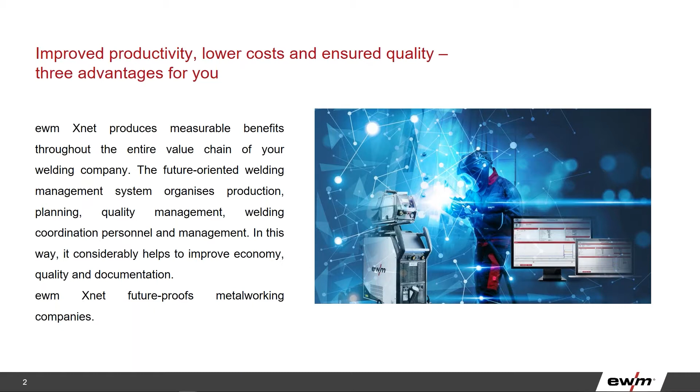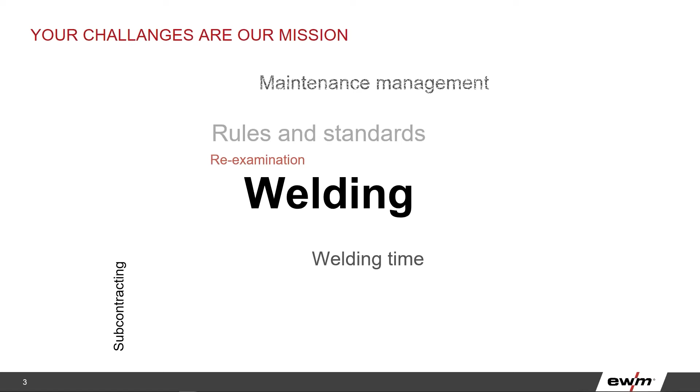This is what describes a system like Xnet. It covers these two aspects, these two points, with a few additional functions, of course. But these are the main two things we care about with a solution like this. And this is what we want to offer for the welding process, because when we're talking about welding, we're not just talking about heat input and welding arc and base materials and filler materials and so on. We're talking about also a lot of other things which will appear now here on the screen.

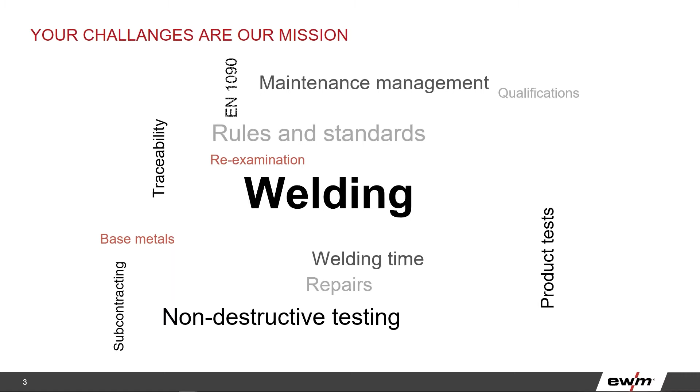We're talking about productivity, we're talking about standards, we're talking about personnel qualification, we're talking about welding documentation, WPSs, WPQRs, a lot of stuff going on in the welding. And to keep track of all of this, be efficient in the work with all these things, and achieving this high level, as I said, of quality assurance is not a very easy task.

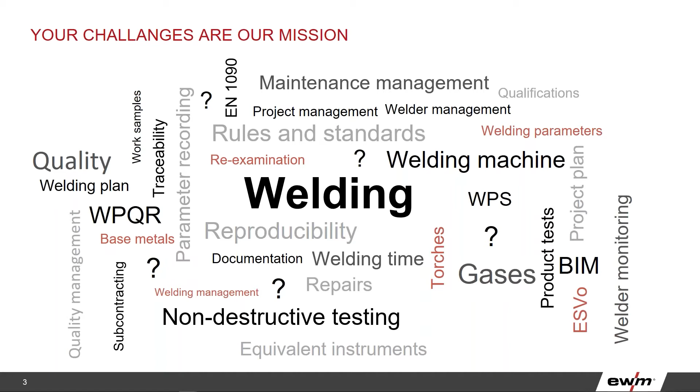And this is something that we took a look at in the beginning, and said, wow, this is a big job, and still we took it. And I'm confident that we are able now with Xnet to offer a very, very good solution to exactly these things. What is actually the biggest obstacle here?

Welding is a very conservative business. Welding machines are normally big, heavy, dirty. The welding process as such also, and therefore a lot of users, a lot of companies are of the opinion, okay, we buy once a welding machine, and even if it's 10 years old and the arc is still burning, it's still a good welding machine. Of course, in the case of functionality in terms of welding, that could be true or is true most of the times, but to use the modern technologies and modern possibilities with old equipment is almost impossible, at least not to 100%.

And this is something to be considered in order to use nowadays potential of systems like this. We have to have also an equivalent equipment on our side, and this is an equipment that could be connected to a network that has the according interfaces to receive information and also to deliver information.

And that was the biggest challenge for us, how to create a solution which is, of course, based on the latest technology that we also develop in the form of welding machines, but also in some parts or in the most parts can be also applied with present equipment in a company.

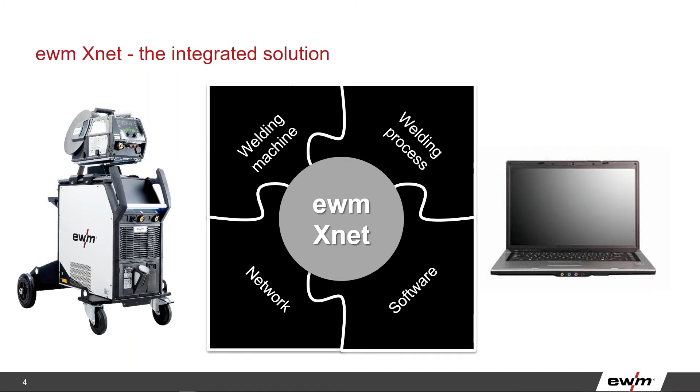And the reason was we were talking to some customers, but not to so many at that point, and we didn't understand completely what is actually the motivation behind wanting to have a solution like this. After that, we started very intensive discussions with different potential customers and also existing customers on the questions: what do you need a thing like this for, and what are you hoping to get out of this? And then these two main topics appeared.

First of all, we needed to gain data in order to calculate, to be able to see where we have potential of improvement, where we can save time, where we can save material, where we can increase efficiency. This was the one aspect, and this is the clear data aspect and evaluation aspect of data.

And the other aspect was, some of our customers wanted to see which part, which component was welded when, how, from whom, and all this relevant information gathered somewhere centrally and available not only now and not only tomorrow, but also in the next 2, 3, 5 years. Because sometimes I still have to show the quality of my work, even with 5 years in between the production and the moment I want to do it.

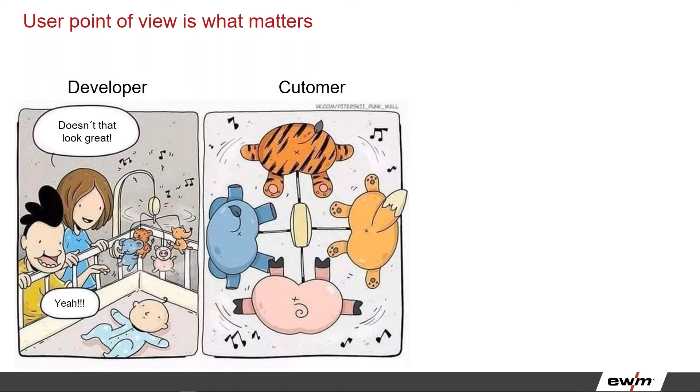And normally everything starts with information about the welded component, bridge or whatsoever. And when you have that information recorded in a digital system, then you can hopefully connect it to the welding equipment that you used for the welding, to the welding process used and recorded, to the employee that was actually involved and performing the welding, to the documentation which was required or used for welding of that part.

And then with the recorded result, you connect it again with the component, so you have everything together, hanging to each other. And if you're looking for 1, 2, or 3 aspects of those things, you have the possibility to sort everything out and see exactly what happened, when it happened, why it happened, hopefully. And based on that information, you can trace back everything you have done on the one side, and on the other side, you can create very exact calculations about your consumption, your time, material costs, and a lot of other things that you can gain from combining the different parameters which you have been recording.

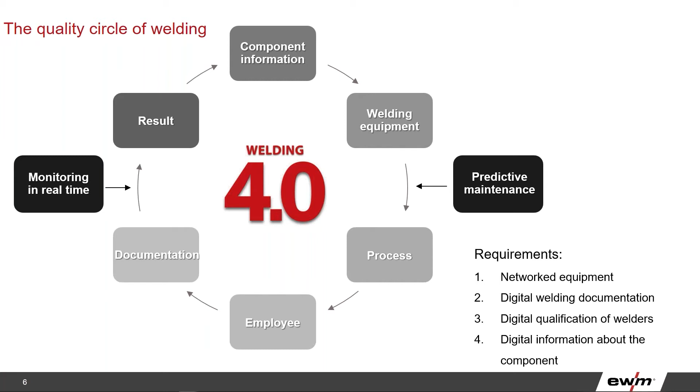Real-time monitoring is so important because it gives us the possibility to really see things in the process which could be relevant for the quality on very short notice. And that is exactly the potential of real-time monitoring for saving costs, because otherwise, if a deviation in the welding parameters is not noticed and leads to a defect in the weld, this defect will probably be seen sometime later in a non-destructive test, and then we have to repair. But the later we discover a defect like this, the more expensive it becomes to correct it or to repair it.

And by monitoring the welding process in real time, we have the chance to react to changes in the welding parameters and then see if there is a need to do something, to correct, to repair, or to say, no, these are just standard deviations in the welding process, they're okay, we can ignore it and continue.

What is the most important thing from my point of view in this possibility is that we now also have the possibility to transport this information directly to the welder. On a display on the welding machine, on an LED bar on the welding machine, or whatsoever, in terms of color or in the form of text, we can communicate this to the welder so he can act right away. This is something that is not possible right now. The welder welds, after that he performs his visual testing, and that's it.

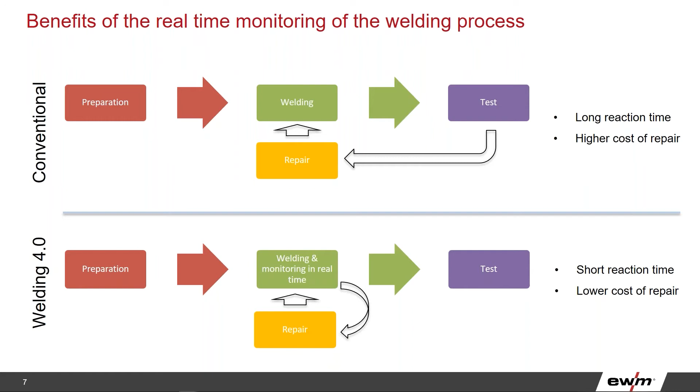But he doesn't see the actual recordings, the actual parameters of his last weld or previous welds. And with a system like this, we can transport this information on a tablet, on an industrial PC, even on a smartphone, directly to the welder, so he can connect to his machine, he can see his last welds, he can see everything was okay, he's inside the tolerances. So the probability that something went wrong is much, much lower. And this helps us again to really meet the requirements that we have set for ourselves or that are set externally by standards or customer requirements.

Predictive maintenance is another topic that brings high potential of cost savings, because when we use a system like this that records our welding parameters, it gives us a chance to establish process secure times - durations in which the welding process runs smoothly and constantly and brings exactly the result and performance that we need. Then we can use this time to activate maintenance timers that inform us this process secure time is over, and we should perform the required maintenance in order to ensure the continuing productivity and security of this process. If we don't do it, the welding process becomes more and more unstable until the big bang comes.

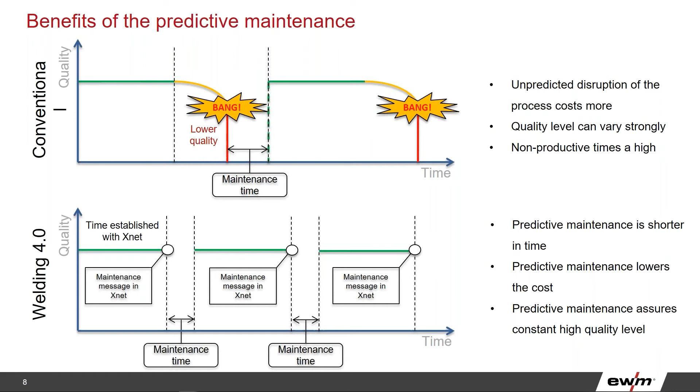Well, after I introduced this overall possibilities with Xnet, let me get a little bit more specific about the product.

We're talking here about a software solution which is server-based. It's installed one time somewhere in a company. The recommendation is to do it on a server PC, because then you've also taken care of backup of the welding data, security and so on. After the software is installed on the server PC, access to the system and the recorded data is just over a web browser on a device inside the same network.

So no additional installations are required, no additional settings are required. Once the software is installed and running, you can access it from every device inside the network, and you only need a web browser for that.

We have a modular structure of the product, which means the user starts with a basic set, which gives them the possibility to connect the welding machines to the network, see them online, record the data, and use maintenance and online monitoring of the welding parameters. That's a very good base to start.

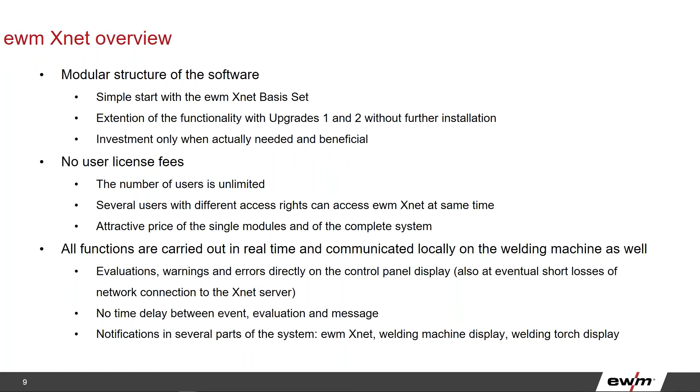So if you have configured the welding machine, even if the network connection is lost, the welding machine still stays capable of acting and communicating to the welder if something doesn't meet the requirements or the required settings.

A very good tool for the welding coordinator, allowing him to create and manage welding documentation, WPSs, WPQRs, even from welded data, which saves a lot of time when you're using already recorded data to import it into a WPS and also to create a WPQR.

That saves a lot of time because you are reusing information already present in the system, and it helps a lot if you're going to get a certification, or if you have to keep your certification according to welding quality management standards like ISO 3834 or EN 1090, because most of the functionality and information in Xnet are actually based on the requirements of those standards.

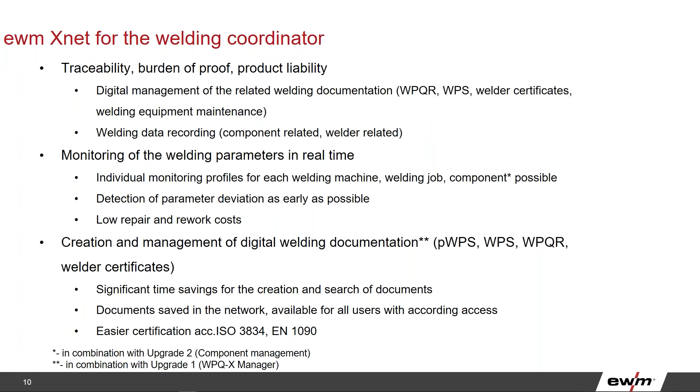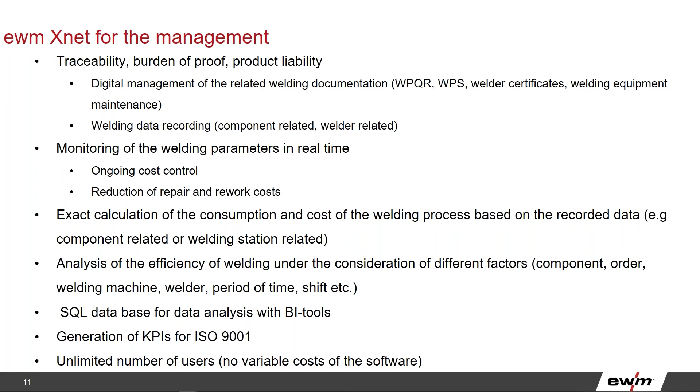For the management, it's very important to keep track of data and numbers, to generate KPIs and to follow up the progress and efficiency of the production. This is something that Xnet delivers straight away.

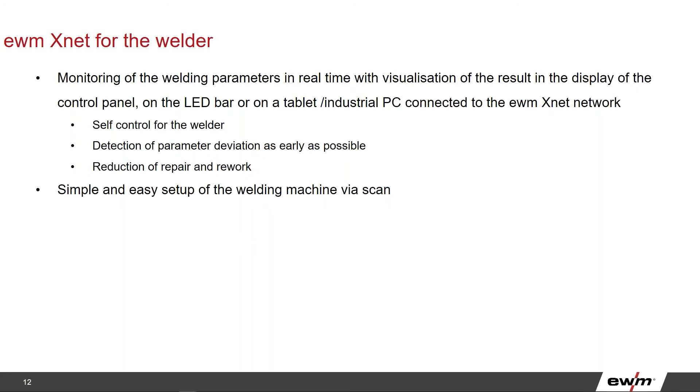And for the welder, very important, he has direct access to his own data, his own welding machine, his own recorded parameters, so he can learn from what he has been doing, or show what he has been doing, and continue working with completely different confidence compared to the current situation, where he only has the possibility to visually see his result, but not to follow up the welding parameters in the last welds.

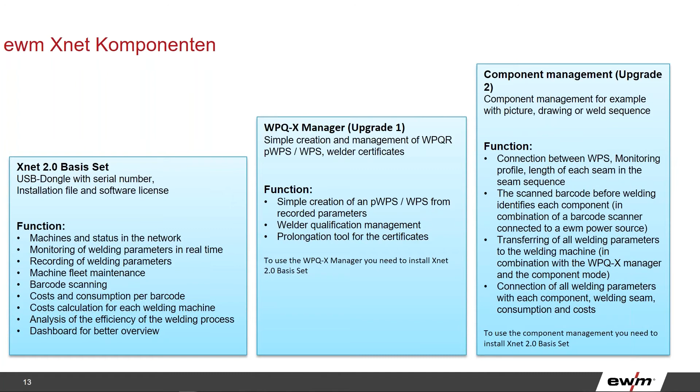I mentioned the 3 different modules, which you can see here on this slide. We start with a basic set with a certain range of functionalities included, and then afterwards you could extend the functionality of the software with a WPQ-X Manager or with component management functions. The way you combine these modules gives different possibilities and functionality ranges. I don't want to get into details here, just remember this slide.

And if you should have any questions, you can contact us, or contact one of our certified sales partners in order to get more detailed information.

Probably the last slide, if I take a look at the time. Yeah, I have 2 minutes left.

And from there, this information is available to anyone who has access to Xnet with username and password, to access that data from any device using just the installed browser of the system.

I mentioned the SQL database, and this is important information because it's actually at the customer's disposal to be used, to be connected also to other tools. So you can merge this data with information from other databases. For that, you need a dedicated BI tool or the according middleware that allows you to merge and distribute data from different databases.

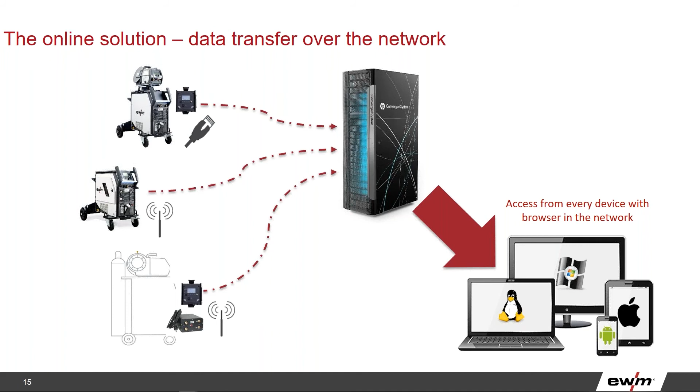The same thing can be done with other tools. I just wanted to show that it's possible to access the data of Xnet with different tools, which makes working with those numbers and information very flexible.

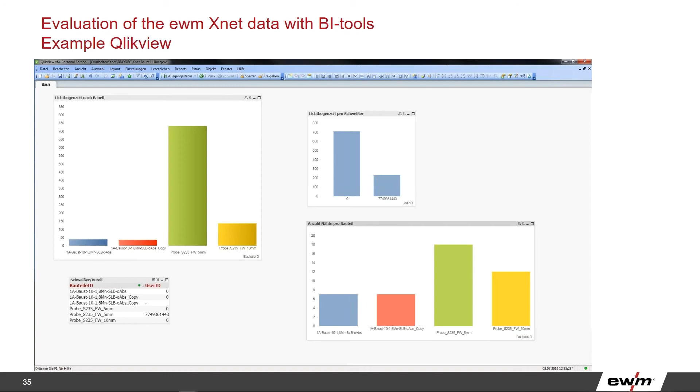So I came to the end of my presentation, and would be glad now to answer questions if you should have any.

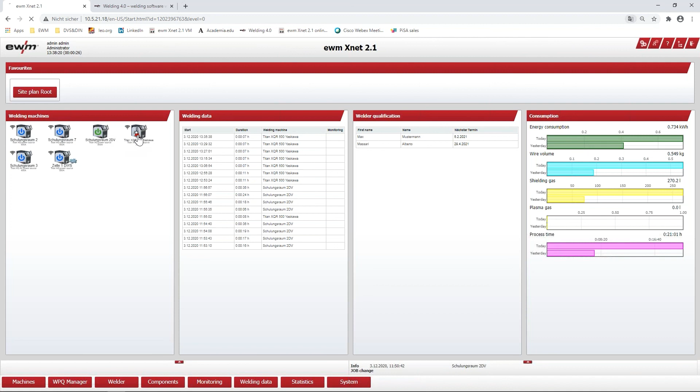We can even see currently a welding machine in real-time welding. If we connect to it, then we can see the welding process live as a graph running here. Oh, we just lost it. The colleagues in our application center are currently welding, so if we're lucky, we can take a look at a real welding process right now.

In that case, we're talking about a welding machine that is used now for aluminum welding, as you can see here, with 1.2 millimeter wire and 100% argon as shielding gas.

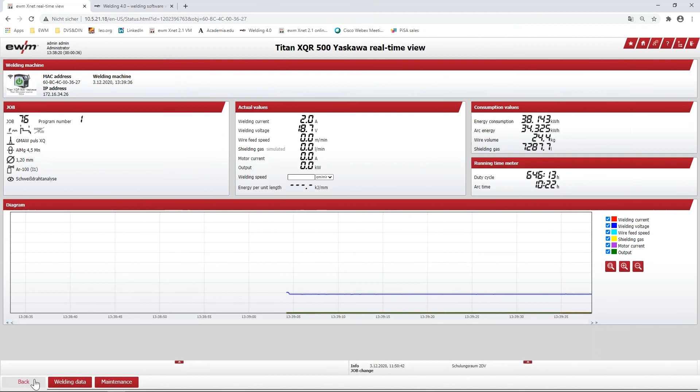But these are just a few things that you can see in the software, up to also recording data of the welding machine with a detailed graph of the welding parameters showing the current, the voltage, the wire feed speed movements, and a lot of things that can be recorded or analyzed.